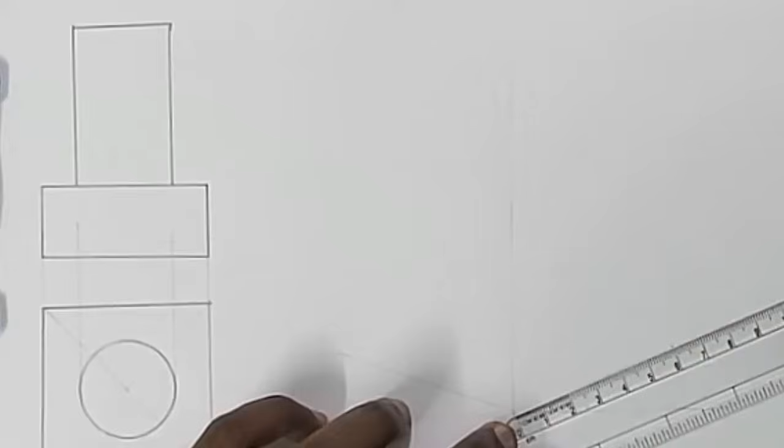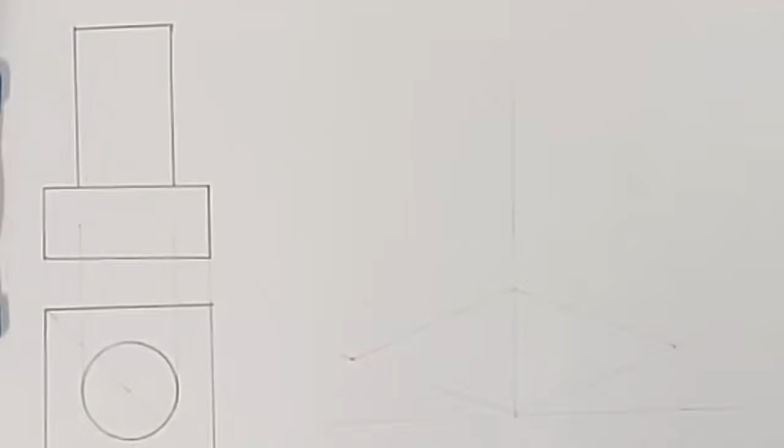Then draw parallel line towards the right hand side 30-degree line to form the base square. Similarly, draw parallel line to the left hand side 30-degree line from this point. Okay, now we have drawn the base surface, and the base slab is having a height of 25 mm. So rise 25 mm from all the bases.

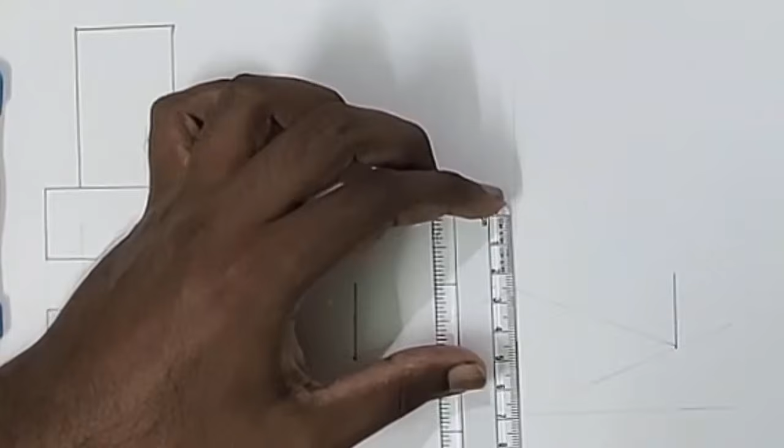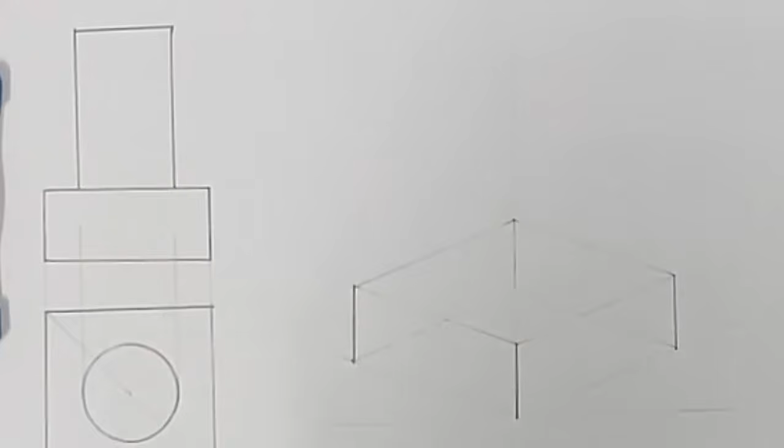And let us draw in thin line, and let us connect the top face of the slab in thin line. Now we have drawn the base slab. Over the base slab we have to draw the cylinder of dimension 35 mm. So measure the distance from here.

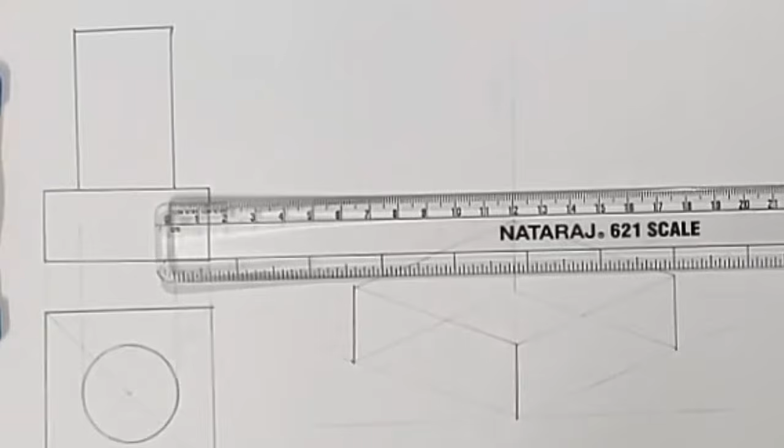Measure the distance from here. Measures around 12.5 mm. So mark that here to the right hand side and the left hand side. And mark that line towards this 30-degree line.

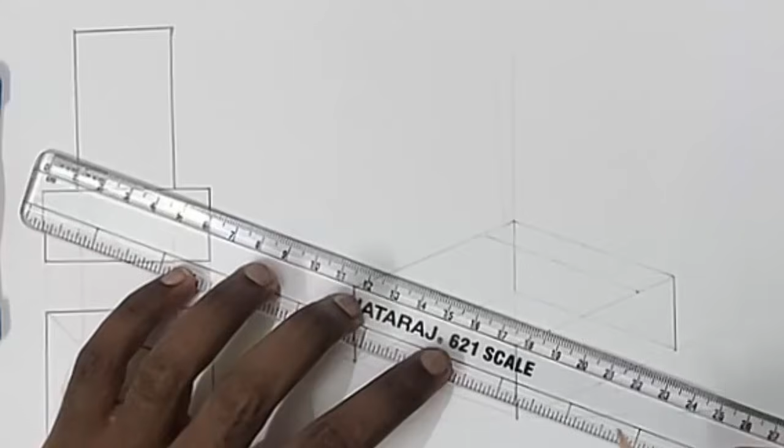Similarly, mark the same distance from here because this is a cylinder. Both the sides will be having the same dimension, 12.5 here, 12.5 here. Let us mark the line parallel to this right hand side 30-degree line. So now we got a square in the center. So that will be having a side of 35 into 35.

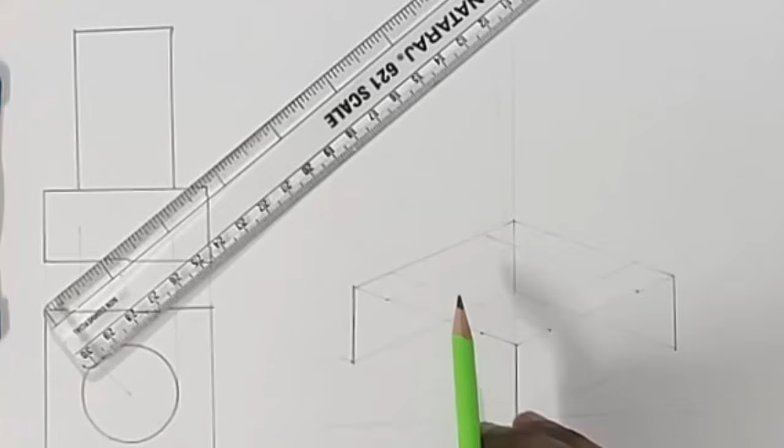So inside the 35 into 35 mm square, we have to draw the base circle, and over that we have to draw the top circle to form the cylinder. So for drawing that base circle, we have to follow the 4-center method. Let us mark the center point of all these 4 lines. This having a dimension of 35 mm. So at 17.5 mm we have to mark the center here.

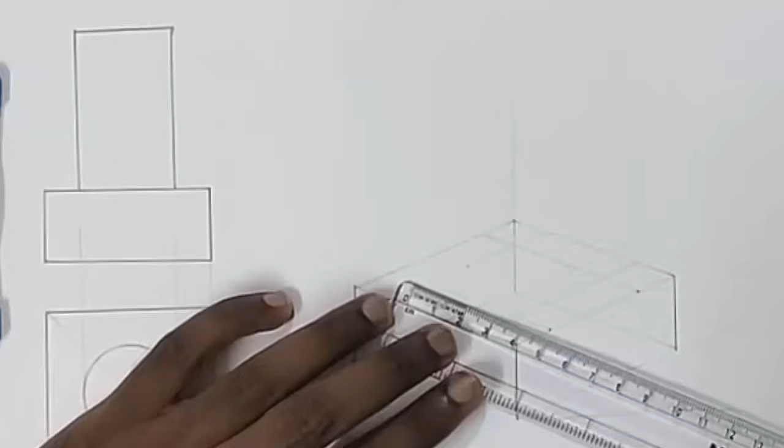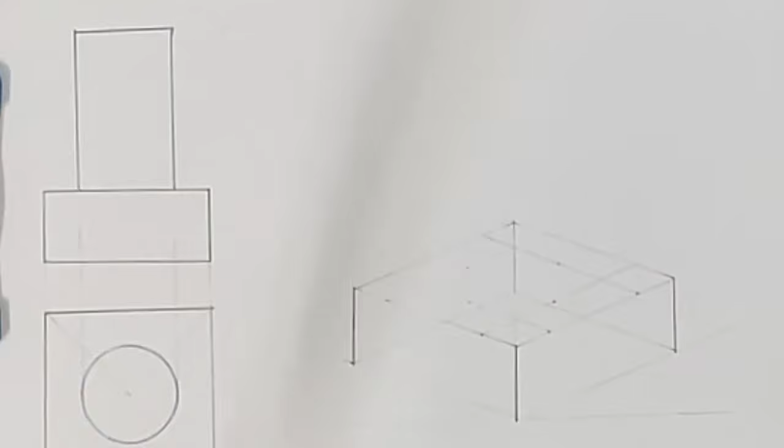Similarly 17.5 mm from this line, and this line. Okay, now we have drawn 4 points. So let us connect the points. Let us connect the left side point to the top point and right side point to the top point, right side point to the base point, and left side point to the base point.

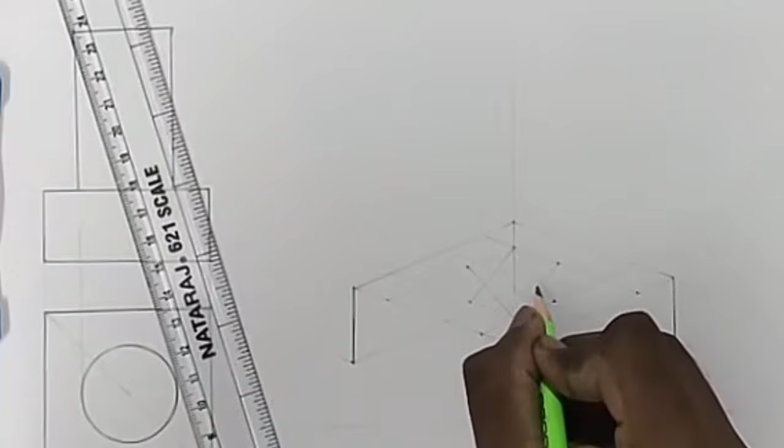So now we got 4 centers, 1 here, 2 here, 3 here, and 4 here. So using these 4 centers we have to draw the circle. It will look like an ellipse. So by having this point as center and this point as radius, draw an arc here. Okay, then having this point as center and this point as radius, draw an arc here.

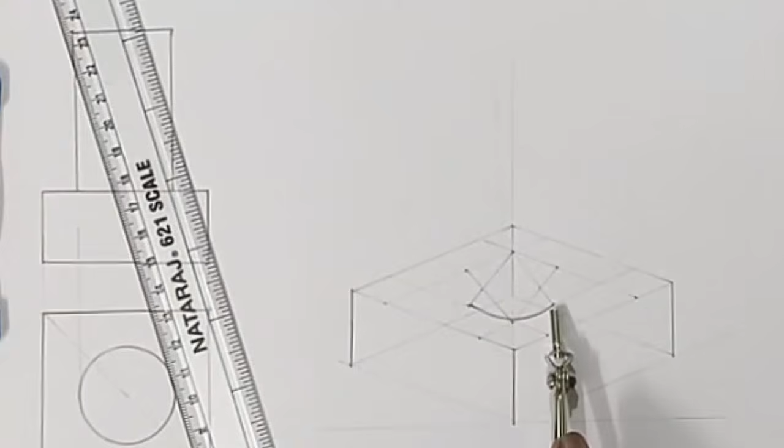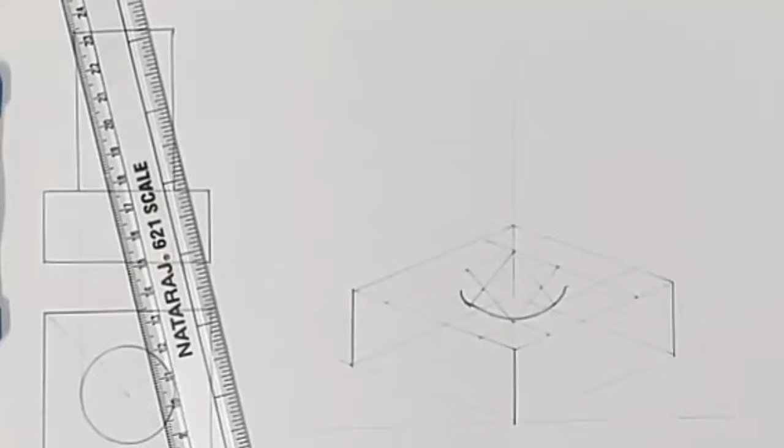Okay, similarly having this point as center and this point as radius, draw an arc here. Okay, then raise the 35 mm square to a height of 55 mm. So to draw the top face of the cylinder, raise this point to 55 mm. Similarly this point, this point, and this point.

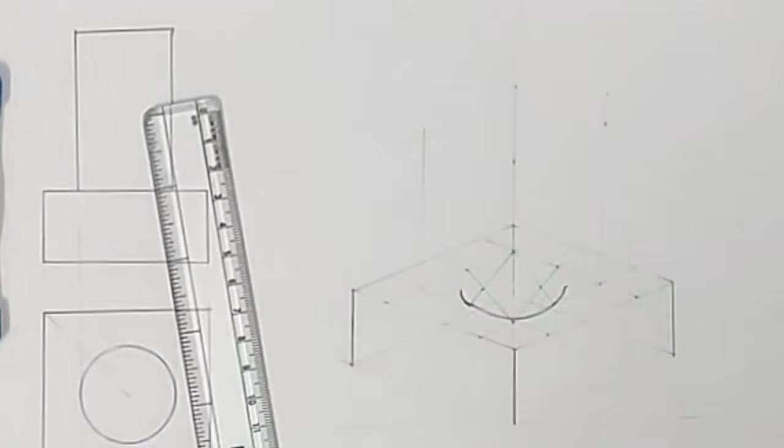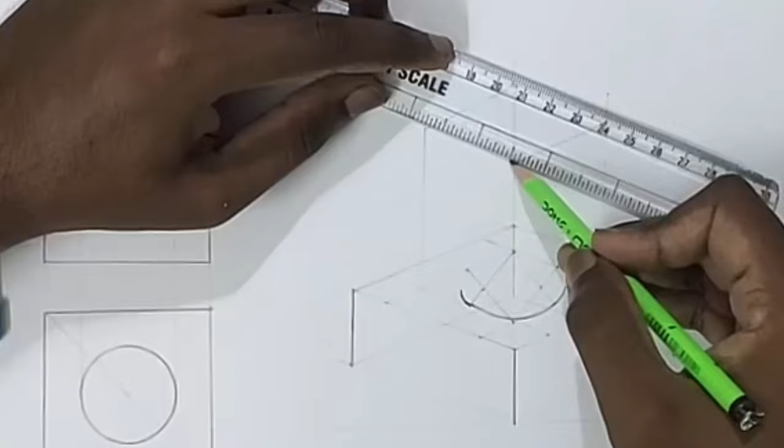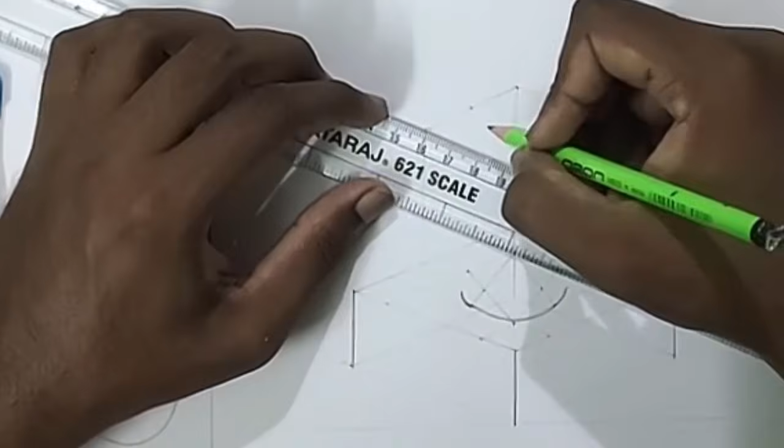So now we got 4 points here. Using those 4 points, draw a parallelogram. Now based on these points and using 4-center method, we have to draw an ellipse here. So mark the center points of the 4 lines. I have marked the center point of all the 4 lines.

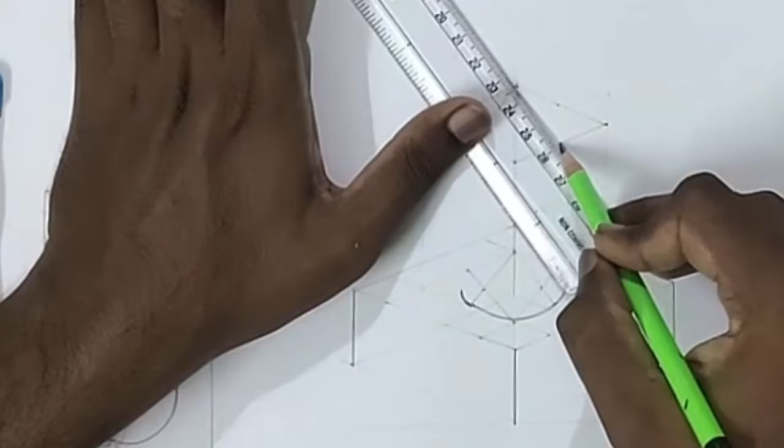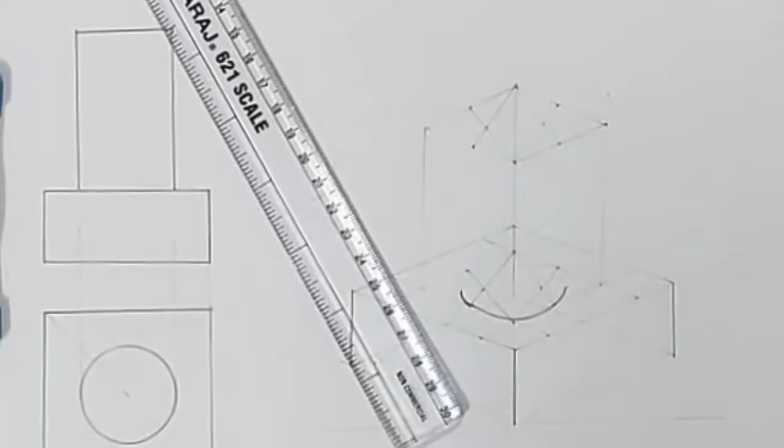Then connect the left side point to the top point, right side point to the top point, right side point to the bottom point and left side point to the bottom point. Then using your compass, you have to use the 4 center method. The 4 centers are 1, 2, 3 and 4. Using these 4 centers, you have to draw the ellipse.

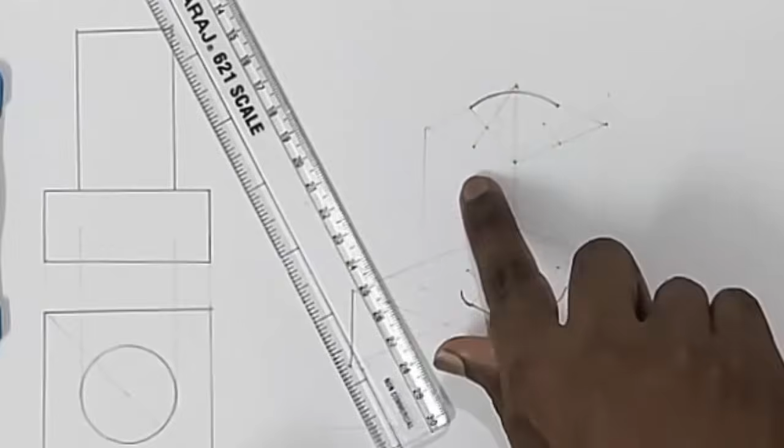Having this point as center and this point as radius, draw an arc here. Then having this point as center and this point as radius, draw an arc here. Then having this point as center and this point as radius, draw an arc here. Then having this point as center and this point as radius, draw an arc here.

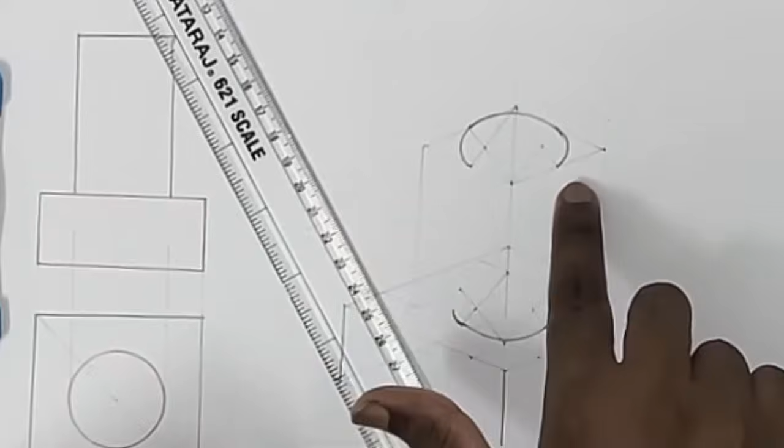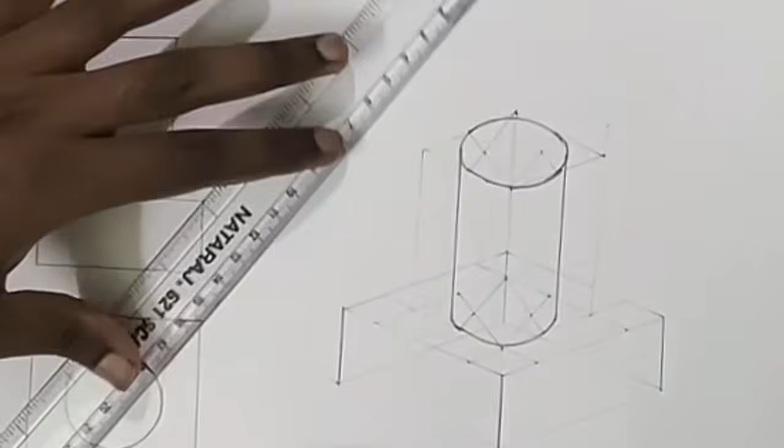So now we have got the top circle. Let us connect these points to form a cylinder. We have connected these points to form a cylinder. Then we have to darken the visible portion of the base slab. Here it is visible up to this point, and here it is visible up to this point. And let us darken all the portions.